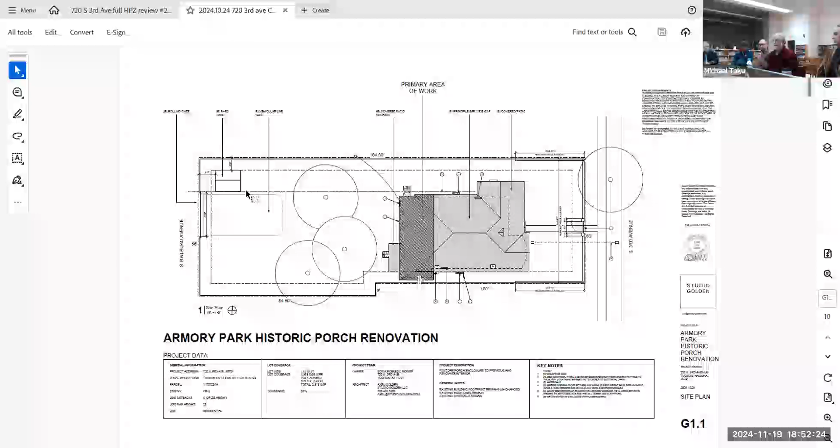Okay, I'm going to focus on the bullet points first, and then we can go back over any, because I think the bullet points will answer a lot of the changes.

So the first one is all new windows to be inset in the wall, not flush mounted, and dimensioned on plans. So I made sure to go through all the plans and make sure everything was heighted and dimensioned. I also added some window details on this page showing the insets, and I showed the original windows in detail. I also detailed the new window over the kitchen.

The next bullet point was specify door configurations, materials, and dimensions.

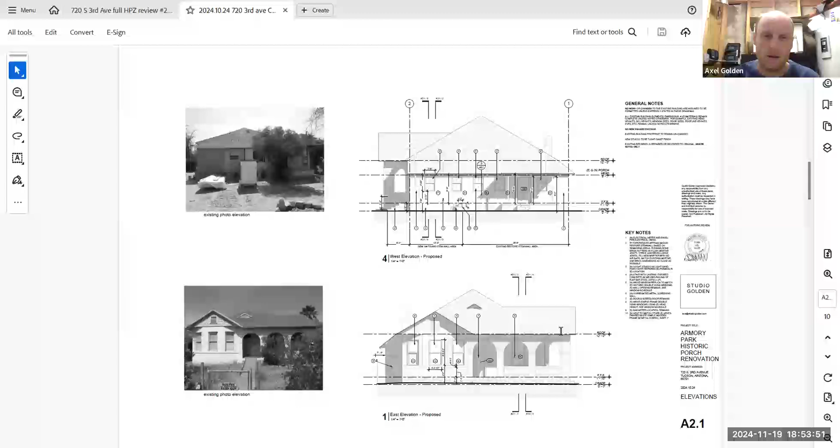I'm going to jump around here. On the window schedule and the door schedule, I put notes here and they're all keyed to each door on the plan, so all the details should be clearly and neatly connected in that way.

The third bullet point says indicate which windows can be repaired versus replicated, so that's also where I use this schedule to keep that tidy.

I think this is one of the bigger changes, which is that now we're proposing these windows to be fully replaced and replicated rather than restored, because I had the artisan back out to the site, and he highly suggested to just fully replicate them with new wood. He said by the time he was to remove everything, it would just be a lot more cost efficient and effective to just make new wood parts and do that. So I went ahead and indicated that on the plans.

So next bullet point, reconfiguration of the kitchen window should retain existing voussoir, western window line, and replicate any extension of a needed brick sill so the history of the window can be read. Also changed from a casement type. That's also keyed here on the plan.

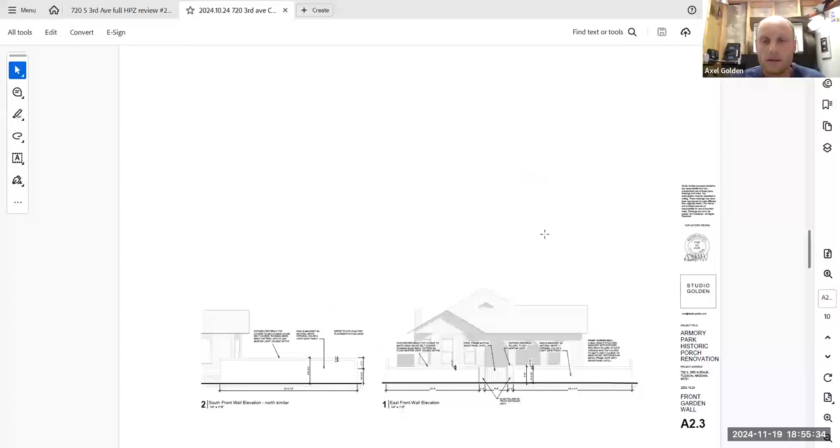I have a detail of it. Let me scroll over to it here. So here's a detail of that kitchen window.

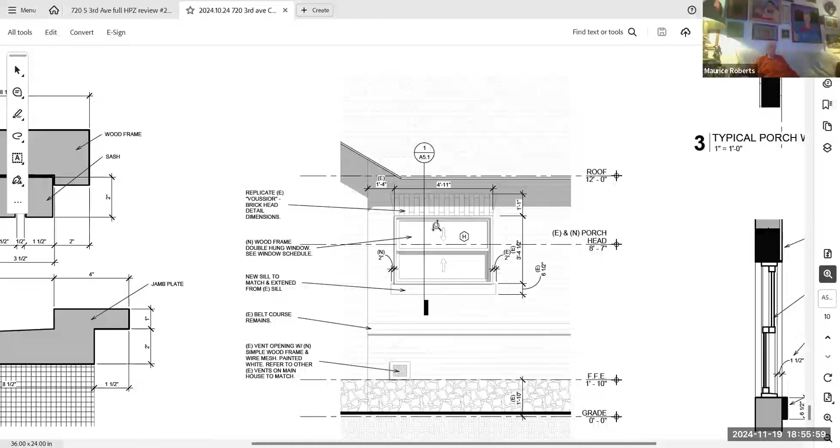We're proposing the window to be exactly like the other windows. However, it's going to have a wider shape to fit into that new opening. And then I have a demo detail of that wall as well, so that you can see exactly that opening.

I think it's at the top here, on the demo plan. Yeah, so right here you can see dashed. This is where we all discussed in the first review to cut just below the existing voussoir and then come over to this window side and create the opening that way.

As shown in the other elevation, the sill will be brought across and matched. There's a 2-inch overlap here on the left. And then I'm proposing the voussoir to come all the way across too and be replicated.

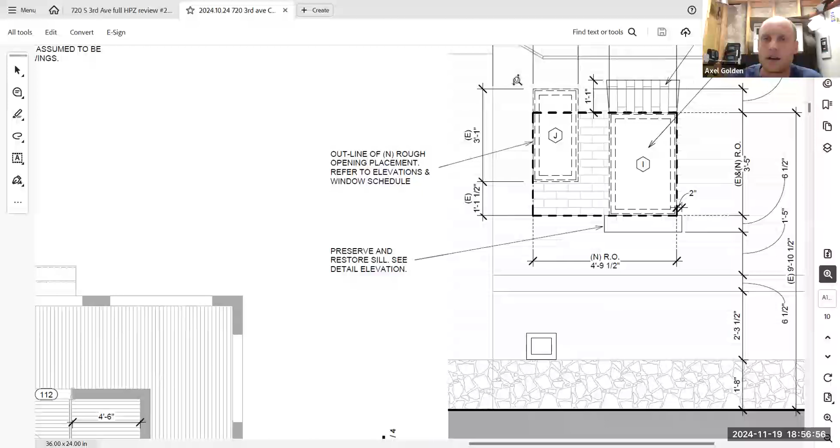The next one is consider reimagining the existing non-permitted rear porch to be compatible by stuccoing the exposed block. So I went ahead and noted that on the plans to stucco over the block, so that we don't have CMU exposed on the back.

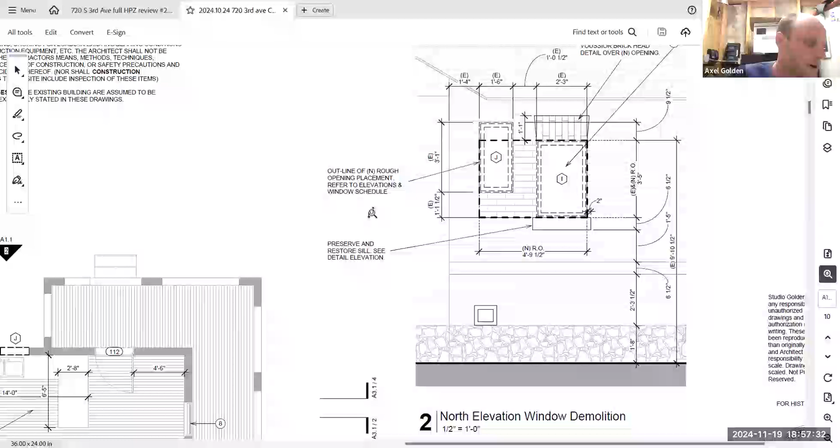Next bullet point is consider vents, scoring lines, and other proposed ground to rafter stucco finish on the rear addition renovation to minimize moisture problems. Provide continuity to architectural lines, specify and finish the stucco on plans.

So I went back over with the client all of our things that we talked about in the last review, and one of the other commenters had talked about leaving the new repaired rear stem wall exposed brick. So I went ahead and changed it to be exposed.

Sorry, I'm trying to also find... Oh, I think this is a good shot of it. It's actually in your other set of plans that were put on the side. There were two different things. You may have it all in one on your computer.

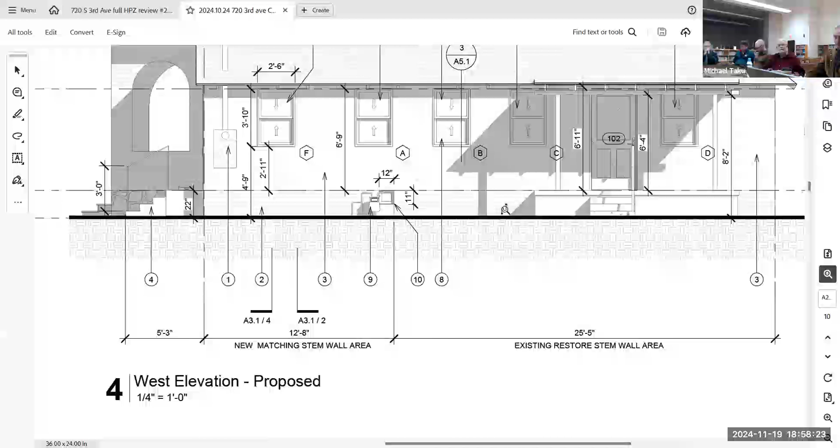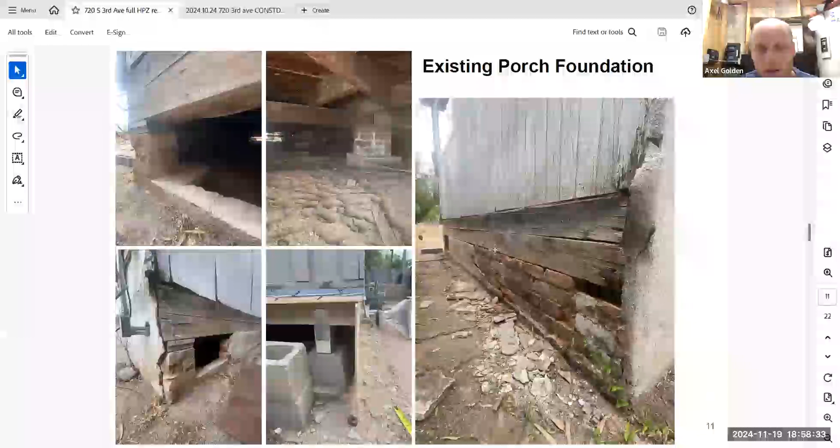So on the previous review, I had shown the stucco coming down to the ground and covering this stem wall. Now we're proposing to leave it exposed.

So I believe that's that bullet point.

Next one is consider screened storm windows for insulation and function of the restored windows, and potential modifications of an opaque and appropriate front screen door. So the client at this time isn't going to be touching the front door. We haven't proposed anything. I think in the future they may want to do something there, and we can come back for another review for that once they decide.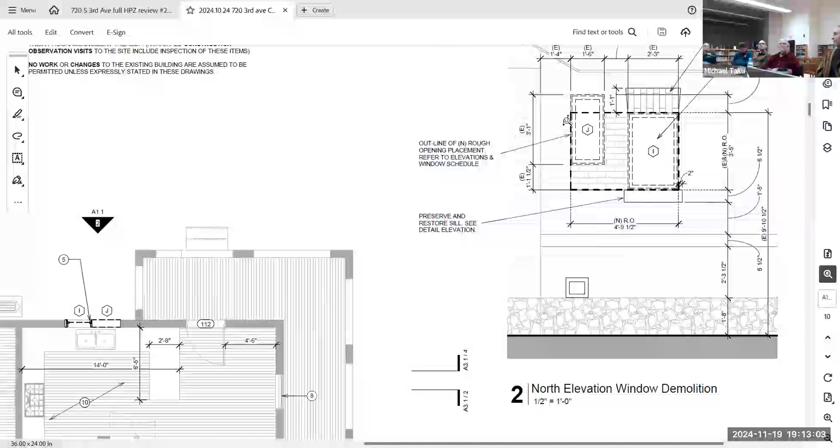Okay, next one, Helen. So what is your gate made of, in the front wall? Sure, the gate in the front wall. Let me go over the material.

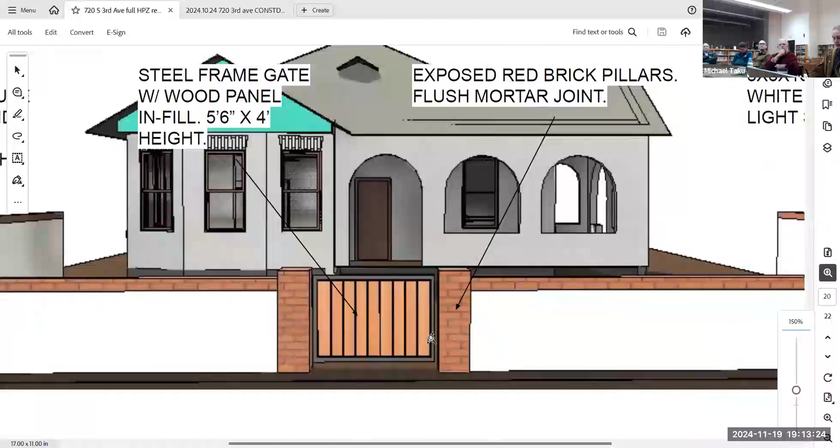Yes, I mean, what's the design? Is it closed? Is it open? It's infilled with wood and it's in a metal frame.

I think in terms of actually keeping the house, you would be better off not infilling. I think that would be one of the criteria, to see the house from the street. I think the wood infill detracts from that.

From seeing the house, the wood does? Yes. Well, it's only 4 feet tall, so you'll be able to see clear over the wall. It's a question of space and visual perception. It's a more modern approach to a gate than is typical in the neighborhood. But other people may want to speak about that too.

There is one thing - your original proposal, when you talked about it last time, showed a 4-foot wall all the way around, and now you've got 6-foot sides. Just so you know.

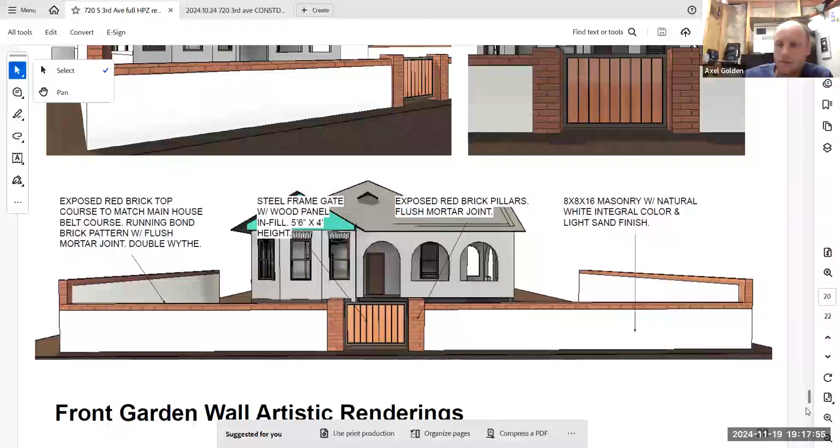There's at this house - let me see if I can find a picture of it. There's a fence to the north. Yep, I think it's just out of frame in my picture. Yeah, it's at 709 - it's an illegal fence. They never asked for a review or a permit, was never approved. So it's right over here on the right side.

It's a metal fence and it's probably 8 feet tall.

Those are never permitted under any case. It's amazing what people do, but we cannot use things that are not permitted as a justification for not following the code. If it were permitted, maybe you could use it as precedent. Based on what they're saying, it was never permitted, so even if it's in your development zone and it's 8 or 9 feet, the code does not allow that, and this board cannot approve you to go up to 8 feet just because that one exists.

No, that makes sense. I just wondered because it looked really tall, and I did look at this house years ago, there was a review for that fence, and I imagine that's when it was put in. But it wasn't clear if that review went through or not, I think it happened in 2015 for that corrugated fence to the north.

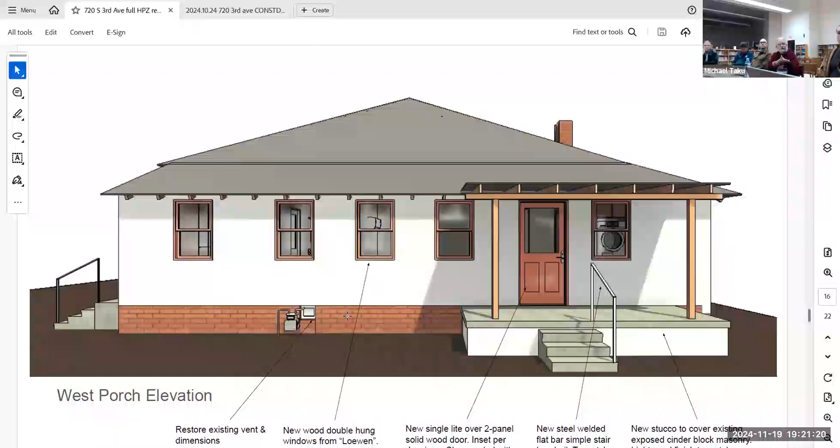I'm talking about the reddish color, it looks like a slump block. So a section of it you said is actually brick, and you're going to replicate it with new brick for the portions that are missing, correct? For your stem wall? Okay, yeah, I think it's not slump block, it's exposed red brick and it'll match the existing brick size, dimension, and color.

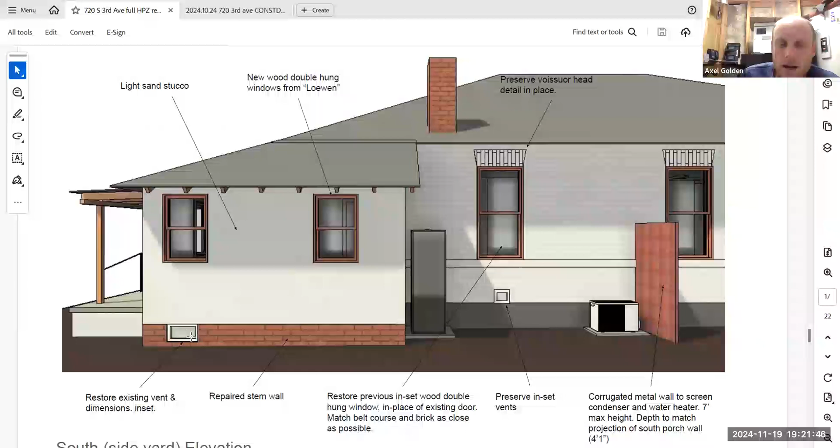And you're going to restore the original vents there so you have ventilation underneath that porch extension? Yes, this is an existing vent on this side, it'll be inset, and this is an existing vent here. And then I'm proposing a new one on the other side here.

Okay, so you get some cross vent. And then you're restoring the vents all the way around the rest of the baseline, which we discussed last meeting? Yes, that's what you planned. Yes, for example this one has a rag stuffed in it right now, so it's gonna get a new vent, properly mounted, and there are a lot of intact examples to replicate.

One other thing, the Secretary of Interior Standards and UDC 5.8 and TSM 9-02 say to repair a window over replacing it. Last time we saw you, you said you were going to do some repairs to a few windows, but most of them were fine and it didn't make sense to replace them.

And now you're proposing replacing every single window in the house with a new fabrication. It does not show an ogee detail, which is original. Are there some windows you'd be okay with retaining the originals for, and maybe putting on a new storm window or some other insulation, rather than replacing every single window, because that's not what we usually allow?

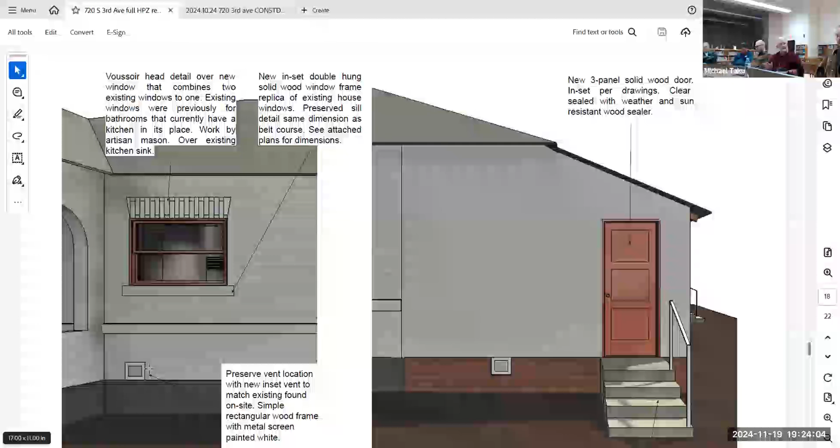Yes, so by storm, do you mean covering it up with a front to preserve it? Yeah, you could make, instead of a screen frame in front, since there's a little indent in the two side portions of the window framing where screens originally fit, a new storm window that is glass instead of screen, inset there over the original window, preserving it in situ but getting the net effect of a dual pane window.

I see, especially those three on the front where you see them from the street. If they're totally brand new, they don't have the ogee, and they're obviously new, even though they mimic the old style, it'll be pretty obvious that everything's been changed on that house.

What if even if he exactly replicates the wood? I was surprised to see it because we had always talked about the south window in the front parlor and replicating one, where you're taking out a door on the south side and putting a window back in, but you had not mentioned any of the other ones according to cost, and now you're presenting replicating and replacing every single window on the house, which is not usually what we ever want to do.

So basically, the code allows you to replace as a last resort. You have to show every effort that the window or the door that you are replacing cannot be repaired. So the first preservation approach is we repair. If you cannot repair, then you can move to the next stage, which is replace in kind. But based on what is happening here, you're just proposing to replace the windows without justifying that you cannot repair them. I guess that's what the board is saying.

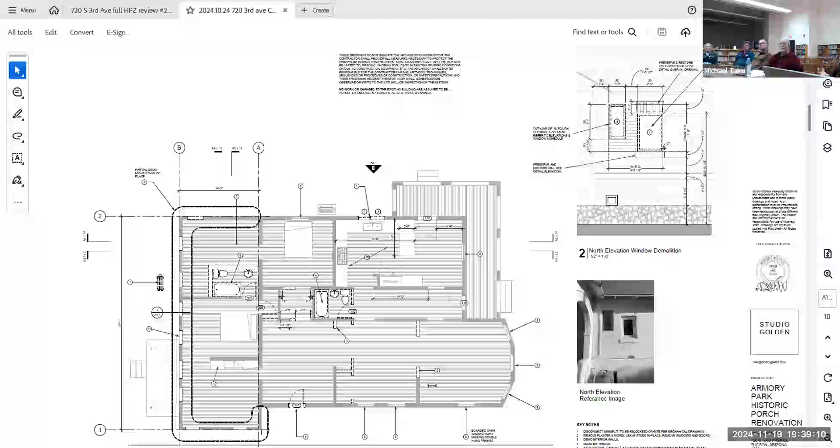And we're not allowed to discuss the inside, but I find it very sad that you're removing the original pocket doors in the front room. There are not that many left, and you've got a really nice set of double pocket doors from your front room that are original, and it's a character defining feature, even though we're not allowed to talk about interiors. So if you could possibly talk your client into keeping those, they will find that the house will have more value and a lot more integrity if you do. I'll absolutely tell him. Okay, anything else?

So instead of the one long window, it will be 2 small windows with posts. Okay, and then on the kitchen window, you retain the original voussoir. You replace brickwork with the string courses that are there, and you do 2 double hung windows with a central post instead of an elongated one, but you do extend the sill. Okay, does someone want to formally make that motion?

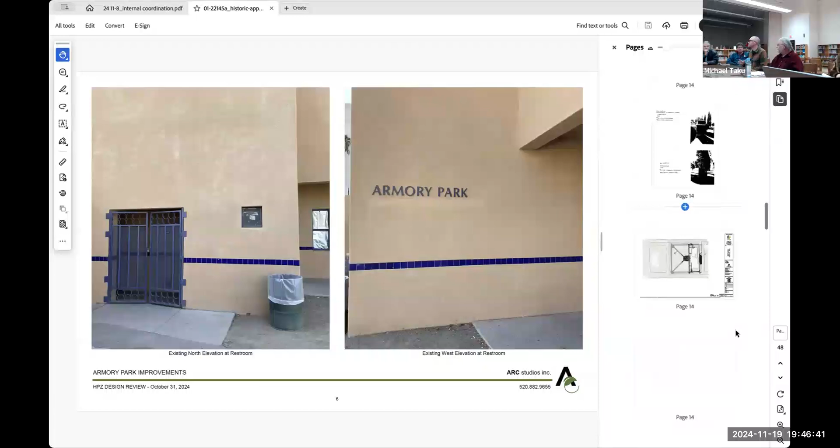So that's pulling up. Good evening, everyone. I'm Matt Smith with Arc Studios, Eric Barrett to my right with Arc Studios, Michael and Valerie with Swaim, and Elliot and Jasmine from the city are on the call as well. We are representing Armory Park, specifically the dog park and the pavilion areas. After the last meeting, we were taking a look at those. And then after that meeting, we met with the historic landscape subcommittees and got some feedback. So we've taken all that feedback and compiled it into what we're about to present.

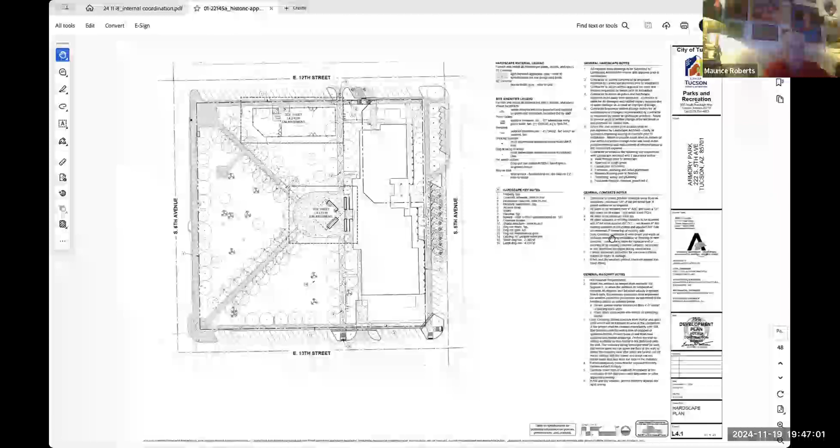Starting with the dog park, the initial feedback was that it was not a shape that fit the park and it was overly large. So we explored some ideas, met with HLS, and this plan works for now, and have this to present. So this dog park, we've turned away from the term 'dog park' and we're calling these dog runs. For reference, the large dog run is 4,700 square feet and the small dog run is 2,300 square feet.

They are all towards 12th Street, with entrances off the sidewalk off of 12th Street. Two maintenance gates over the water line, with one service maintenance gate between the two dog parks. Overall, the dog park intrudes into the park by about 50 feet. It's about 150 feet total long. That longer, you said 145, but that's... round it down. Okay, I don't have those numbers right on. It's all right.

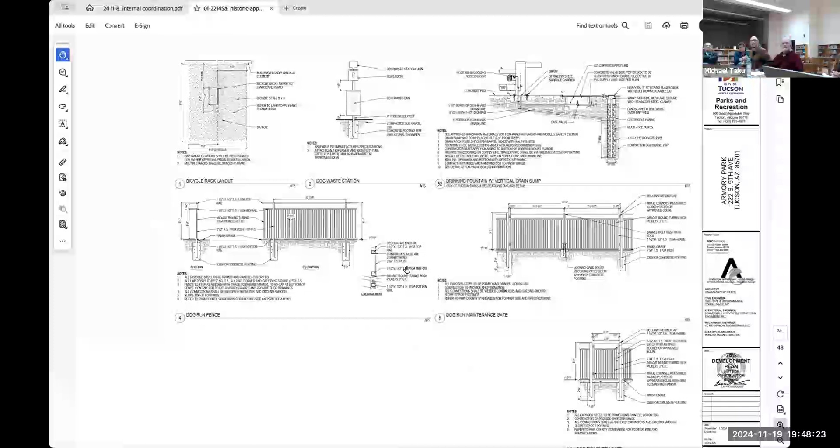The fence itself is still going to be 60 inches tall. It's going to have pickets up to 4 feet with a middle rail and then a top rail, so that top 12 inches will be open aside from 2 rails. The surfacing of the dog park is going to be all sod, except for the 2 entrance corrals and pads for picnic tables.

So these are the fence details. The maintenance gates and the single gates will be in a similar style. Pickets are 3 inches on center, and this will all be painted black or bronze or some color scheme in that range. I know they asked if it could go down to 4 feet, I take it, so they came back and said no, it has to be 5 feet, for security and safety.

It's a quick overview of the changes on the dog park.

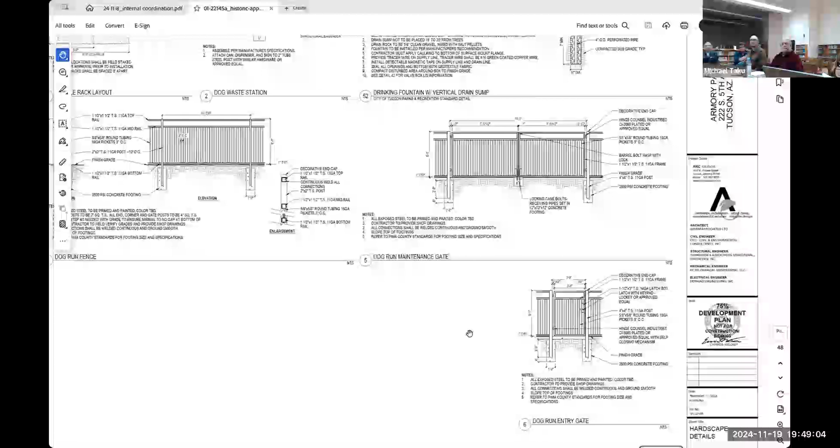Moving on to the pavilion and plaza space, Michael and Valerie will dive into that further, but some of the changes that came from the landscape subcommittee were to remove the central sod area. So you'll see in the drawings that is going to be replaced with concrete, and we are going to share generally two versions, one rounded, one square, for the plaza space.

I think this is a question for you, and we can do it later, but you showed us plaza street furniture before, and then the city said concrete. Are there just now two picnic tables and two benches in the dog park, and no other benches and tables in the park? There'll be other benches in the park, but they'll be concrete. Picnic tables, as of now, are just within the dog park.

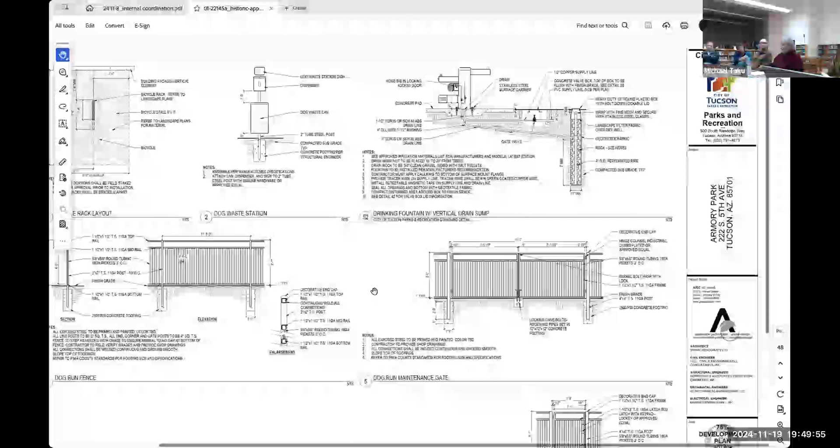Are they shown somewhere or no? I've got questions about plants, but we can do that later. Okay.

So yeah, like Matt said, we met with the historic landscape subcommittee. Helen was there, so she was a witness to all that. This is what we presented before, the different options.

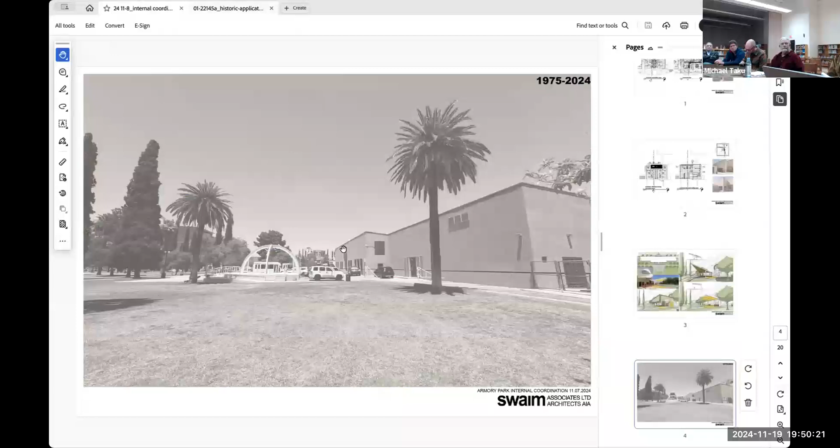I did want to show just briefly the park pictures again. Let me close this, I think it's a little larger. Sort of current condition of what we are looking at, with the existing band shell that we'll be removing.

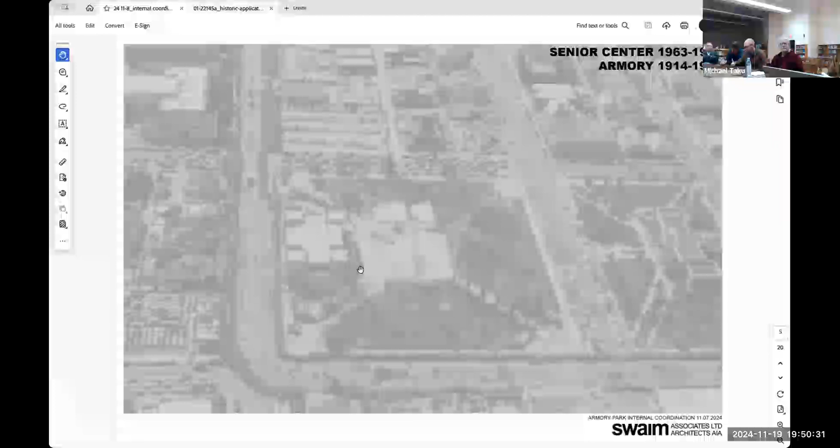This is the park from the mid-century with the larger plaza. This was one of the things that did come up in the historic landscape subcommittee meeting, about the central plaza being more square than round, and really talking about these trapezoidal shapes on three sides being the character-defining feature. So we were working with that in this redesign.

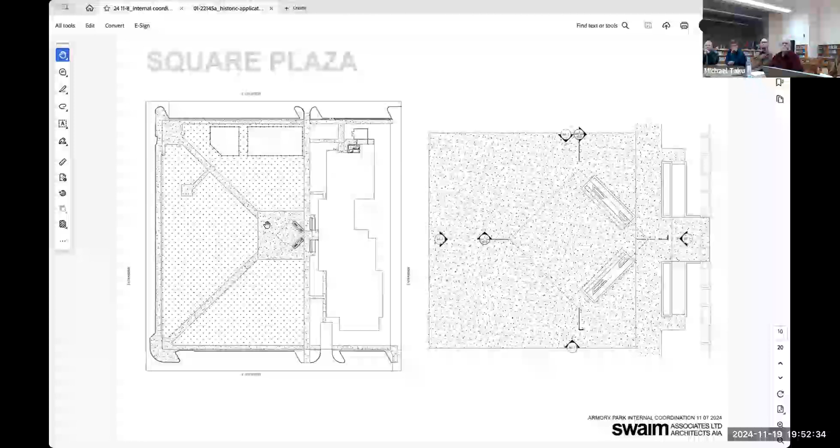The other comment we got was not to have any turf. We used to have turf in the center of that circle, and it was brought up in the landscape subcommittee meeting that traditionally there was never any turf in the center of the park. So we were asked to remove the turf and provide pavement there.

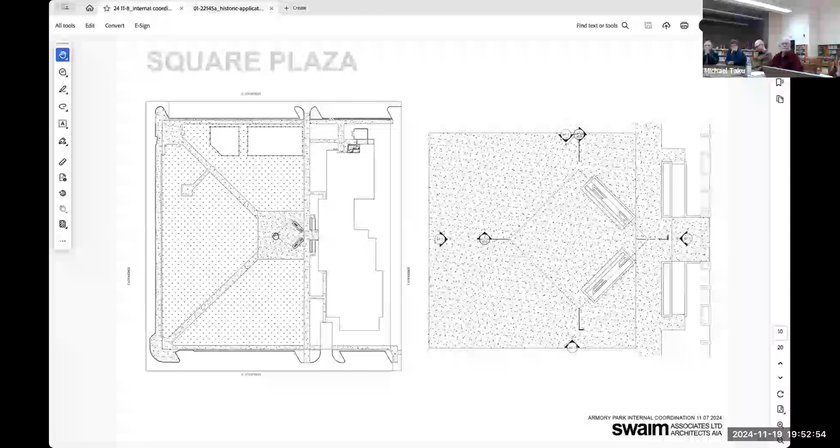So what we're showing here is that simple square plaza with our diamond-shaped pavilion sitting on that. The way we've laid this out, actually, the point of our new pavilion is about in the conceptual center of the park, as you'll see in the later drawings.

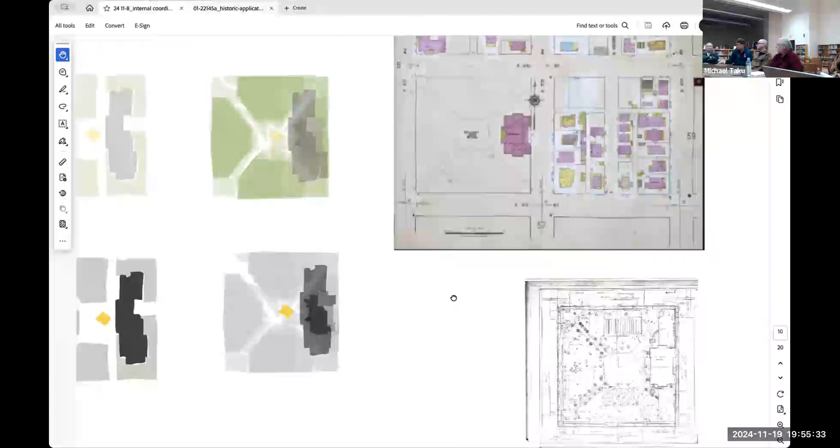So my dates are a little off. The photo you showed that's mid-century does show at least the north and south sides having a little bit of a curve, which is this drawing here. Let me zoom in on this.

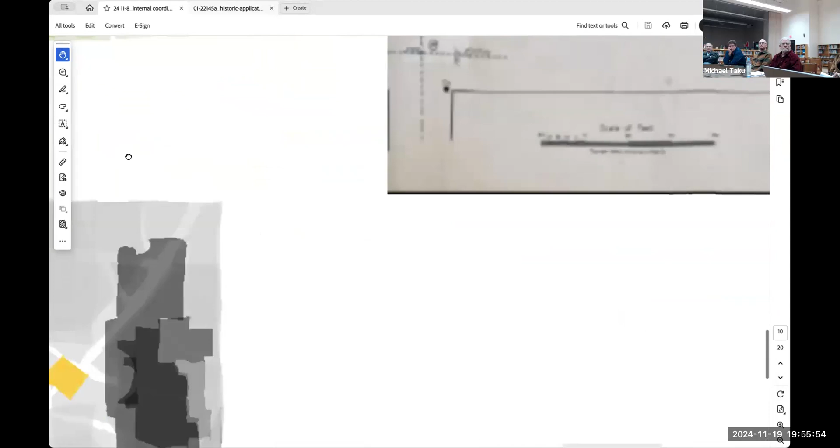Get way in there. This was the document from the mid-60s, so it's kind of there, but it's eroded to a certain degree. The edges of that pavement have simply come apart, I think, more than anything else—that's what was happening there.

So they were comfortable with the form and shape of the pavilion, but they were not supportive of creating a solid screen wall there, and actually suggested we have no plantings in the center at all. I think we'd still like to have some plantings, and we can have that discussion tonight.

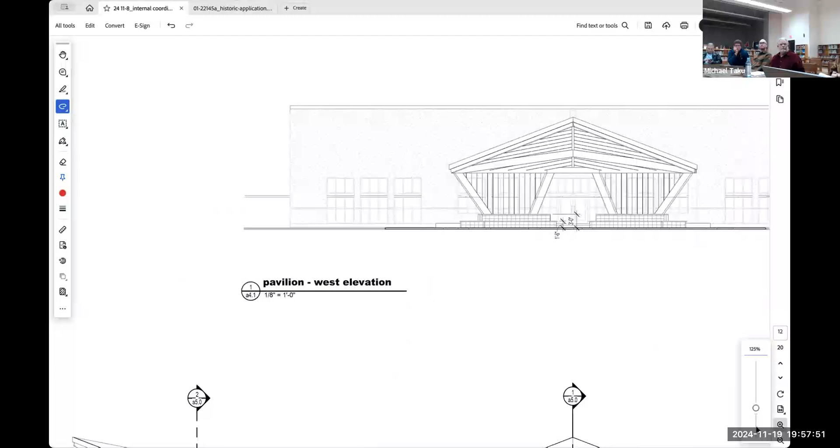That's what you're seeing here—these would be some vertical cable structures that we could grow something thinner on, some vines or something that would create that backdrop, or use as a basis for putting up backdrops if something was staged. Actually, the way the structure is laid out, we could have hooks and hang things from the structure itself as backdrops against that back area.

And Valerie, jump in if I'm missing something. Doing great. All right.

Everything's a little laggy tonight.

The other things we talked about were, again, we're showing this as block only because that's what Revit does. We're thinking this lower portion, and you'll see this better in the renderings, would be either a dark masonry or the black rock from A Mountain if we can get some of it. So this is all dependent on what we're able to get, but at least we want to use a dark, more irregularly shaped masonry for that base layer at the bottom. It would have a cap on it that would be a precast concrete cap that you would sit on, making the seat wall.

And then we were creating a higher wall behind that. In another rendering, this is shown as concrete, because the one thing the landscape subcommittee talked about was people actually being able to stand up here and use these pieces more as an occupiable space rather than just a planter that keeps you out of them. So from the pavilion side, the underside, you'd be able to sit and stand on those two tiers. And then from the backside, it would actually drop into the planter where either vines or some low ground cover could grow. I'll show you the plan of that in just a second as well.

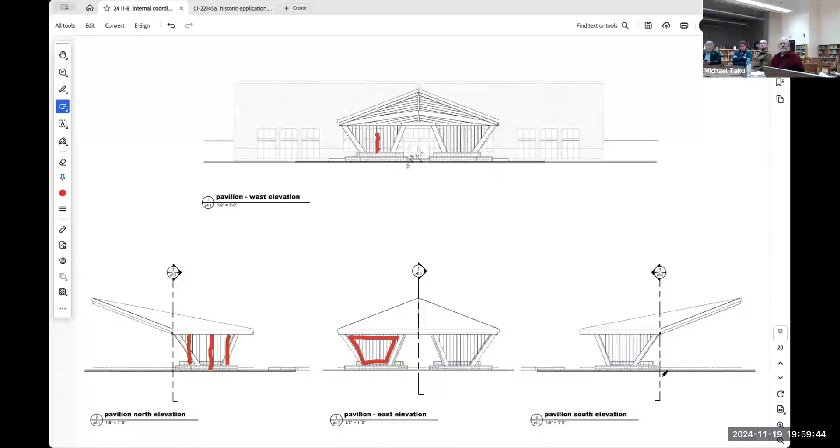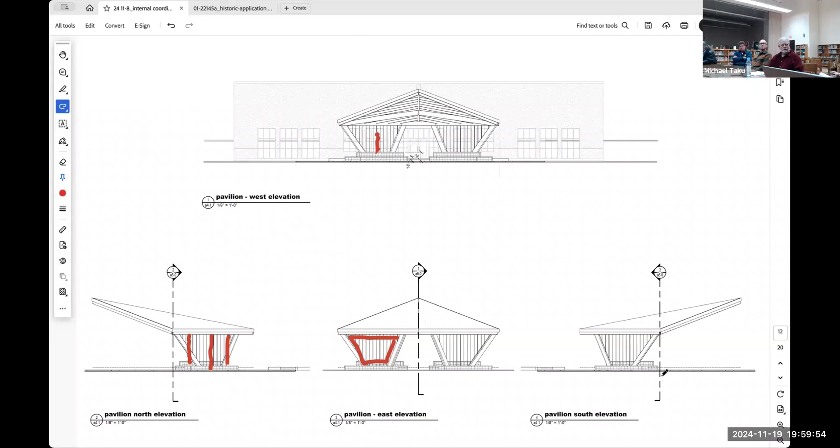Could not tell past the seat cap, is there gravel down in a hole, or is it level? We would bring the dirt - it would be filled with dirt for planting inside of it. So it'd come up basically level with the seat height, okay, or a little lower than the seat. It was hard to tell from the photos we got.

The roof material, we talked about this last time. We're looking at a metal diamond shaped shingle, which we think just has a better scale to it. It's also painted, so it could have more of a matte finish and we won't get reflection. We were very concerned about the light reflecting into the senior center itself, so we were trying to find a way to soften it.

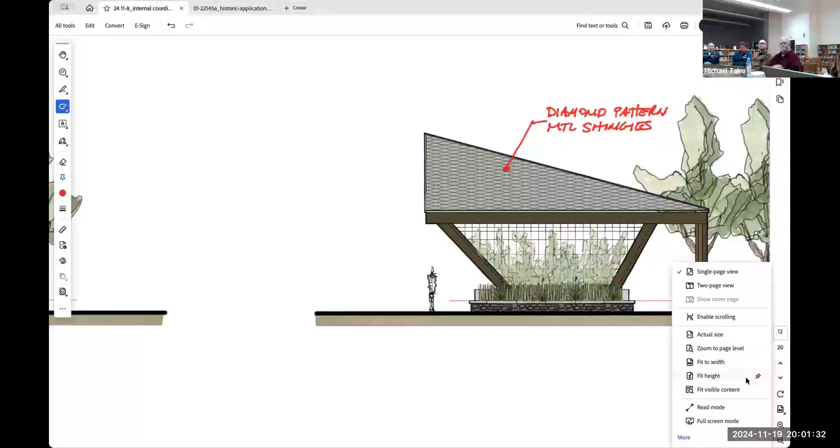The shingles, do they need to be painted or are they factory finished? They're factory finished. We can get a galvalume or something like that, but we felt we didn't really want them shiny necessarily. It could be any number of colors. And all of the angle brace, is that all steel now or concrete? Everything, everything brown here would be steel. So it's completely steel structure, other than obviously the planter.

Let's zoom back to fit the width. This is just a very - sorry, oop.

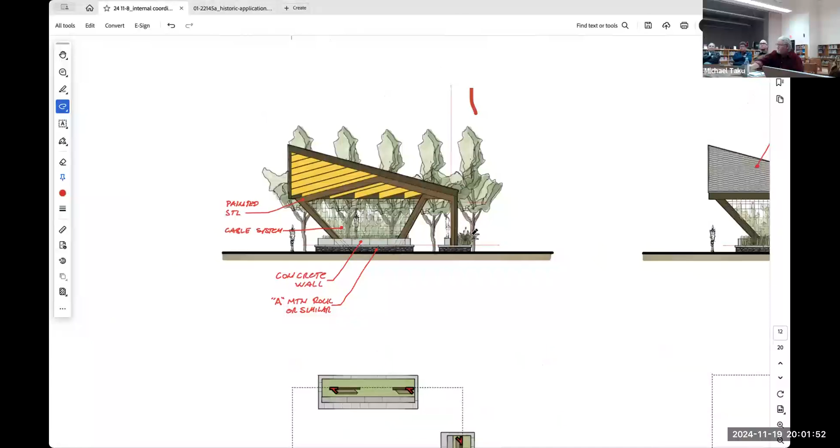Sorry, yes, so that's where you're putting planting. Yes, it's there, well, yes. That's what I'm gonna show. It's right, it's this plan right here. So you can see this is the inside of the pavilion.

That's the seat wall, that's the taller concrete wall. What you're seeing in green is the planting. So that seat wall wraps all the way around, and then it's been reduced to more of a regular geometry, as we felt came out of this meeting and the historic landscape subcommittee meeting - those curved forms weren't appropriate for the park either.

I don't understand that column, the vertical column, the straight vertical column. I see the two sloped columns in the planter themselves, but you don't show the vertical column. You're seeing these two sloped columns in elevation, so you have sloped columns on two sides. So when I look straight at this pavilion from this direction, that column looks vertical because I'm seeing it from the end.

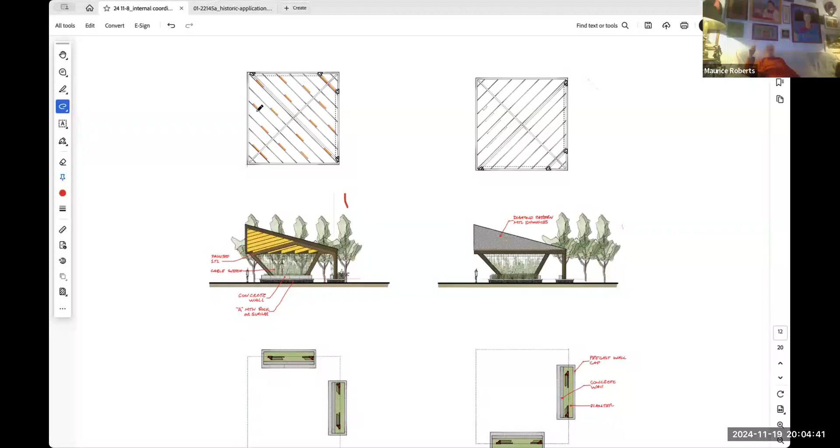I'm proposing yellow right now, but that's a conversation I want to have tonight. That's another item - if we start talking in circles, we'd rather bring the color conversation back for a future discussion, which we're happy to do. We've been going round and round on color ourselves.

The historic landscape subcommittee suggested blues and greens. We just couldn't quite get it to where it felt right to us. So I'm showing more of a bronze, brown, and then this sort of yellow to have this warm glow to it. But that was when you still had 3 processional arches holding up the roof structure.

Now it's entirely different - it's now being applied to the underside. That's probably the biggest change: there were the 3 arches from the previous scheme, and now we're down to basically 2 arches that are slightly splayed.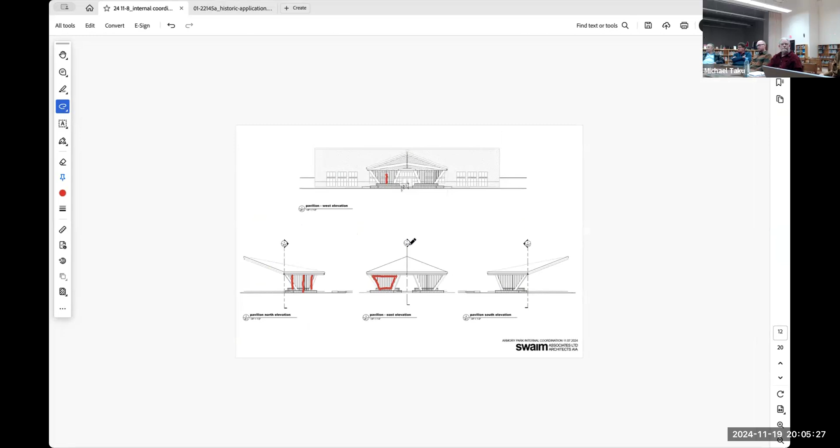And you had them colored red and orange - yeah, it went from red to orange. I was thinking that looked too much like the Tucson Metro Chamber logo. It was bothering me.

These are some additional renderings I did, and this is where you can start to see what that lighting might do. You don't actually see the light source, but you get that warm glow in the park.

The other idea we've been thinking about is that the lighting might be on a sensor, like a parking garage, so it will dim down if nobody's there. But if someone comes and stands under that space, those lights could come up just a little bit. I think what that does in a lot of ways is make it safer if there's lighting under that pavilion all the time.

I think the color could also create a very inviting space for people to move into. If the light comes up, then it's obviously somebody's in there at night. So we're trying to create a way to have this thing be a little bit interactive, but also increase the safety and visibility on the site at the same time.

So they're gonna have to replace all that stuff every 8 years though. The sensors, the motion sensor? Yeah, possibly - you know how Parks and Rec is. Oh, that's true, that's a good point.

These are just some additional renderings, and this one I just took from much further away, trying to convey that idea of having this warm glow in the center of the park.

We can certainly have the lights shut off. This is what we're going to discuss tonight - is this appropriate? How do you feel about this?

In terms of what the fixtures are, this is one example - this is a pendant mount, but they also make a surface mount fixture you can see here. It's a linear LED fixture with both a direct and indirect component. We would mount it to the side of the beam, so some of the light would go up onto the roof to get that reflected light to come back down, and some would actually shine down onto the concrete below.

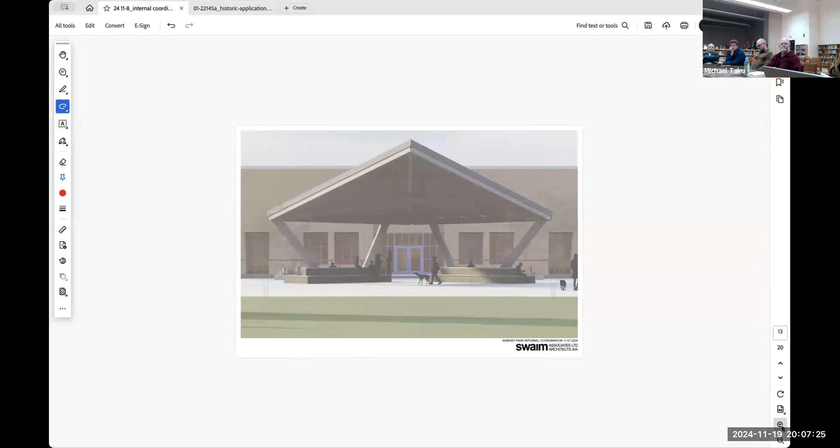We went down to just 2 of these arched forms that are now canted a bit. Here it is from the side. This was why we changed the structure, because in the previous version these were 3 very thin vertical lines, and it felt top heavy. That's how we found to solve that problem and have the columns have a bit more weight, but feel more appropriate in terms of the overall form and shape of the pavilion. They're kind of fun, but don't you just kind of expect Spock to show up?

So it is a contemporary form, and I won't argue that. This is from the senior center looking towards the children's museum. The landscaping in these renderings is not complete and not accurate. I just want to make that very clear.

That's why that rendering you were just on is why I questioned what you were talking about with plantings. That would have ground cover, which is what we would intend. And then we'd have some vines that would come up these, so you get somewhat of a filtering screen and a backdrop for the stage element, but it's not completely opaque.

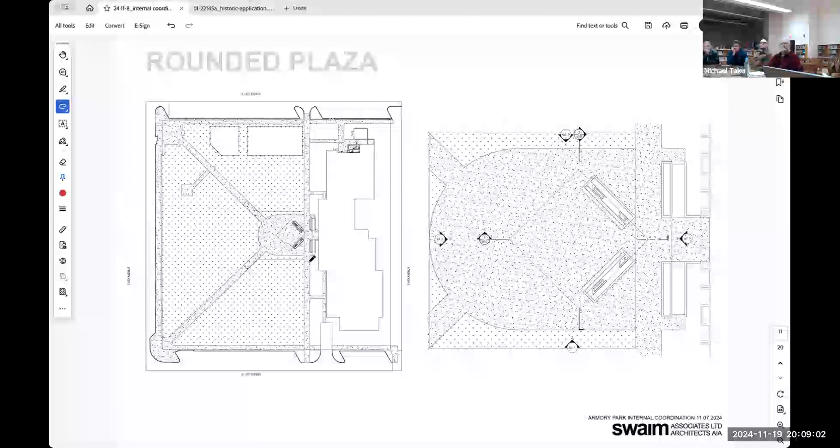The last slide is just going back to that rounded form of the central plaza rather than the square form. You can still see the square form outlined on this drawing, and the square form is a little bit bigger. The reason for that is really to get back to targeting that 1914 to 1963 sort of size of the plaza. That was the recommendation for landscapes. So that's the brief version of how we got to where we are today.

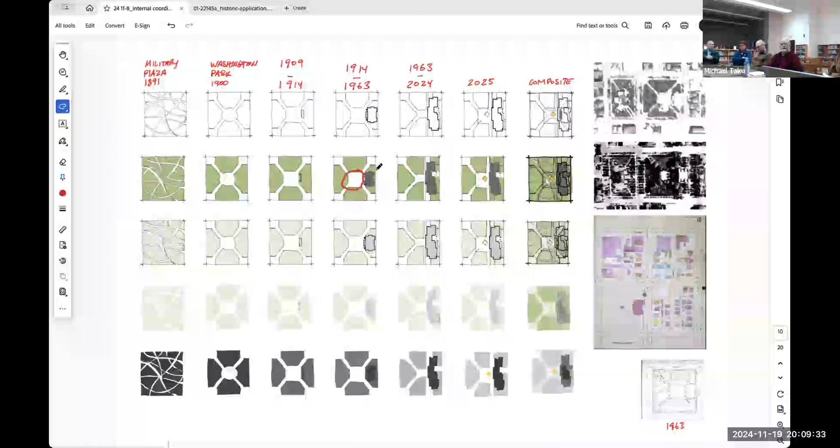Actually, yes and no. They never saw a square plaza, they saw the half circle plaza. But as we discussed it, they did say take out the turf and do hardscape. The entire time we talked about a square plaza. But that to me looks like it's got a north and a south curve to it. Maybe that's just... I'm not disagreeing with you.

Michael, given that this is a park, have you considered graffiti? On the steel structure, it's painted, so you would simply paint over it. I mean, there's not much we can do about that. If we build anything, somebody can tag it. A spray bottle with lacquer thinner works really well, it just melts right off.

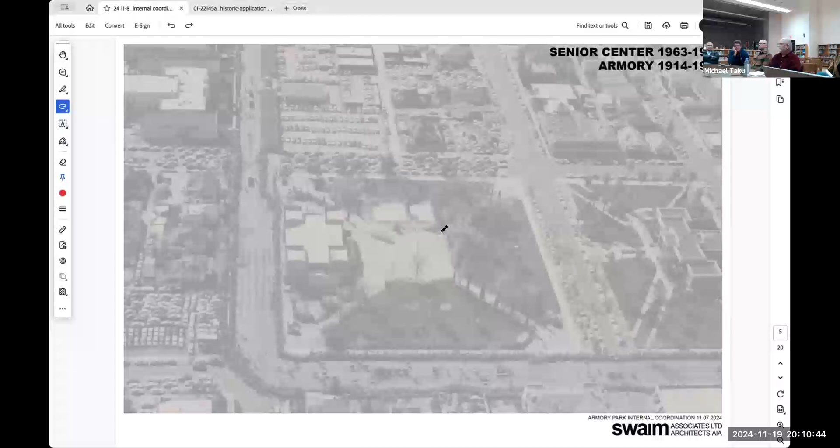So, just delineating the rounded versus angular, would that be in tile or based on the ground? You're saying do both, sort of? No, I was asking how you had sort of a circle inside the square. Oh, no, that was just simply showing the options that were presented, those 2 different design options. One's a square option, the other's a rounded option, and we basically just left that line in to show where that is in the other version.

I'm doing both. Two questions here. How are you going to interface the plaza and the walkways? The idea is the entire structure will be concrete in the center here. I'm talking about the integration as you walk in, in other words, the diagonal pathways.

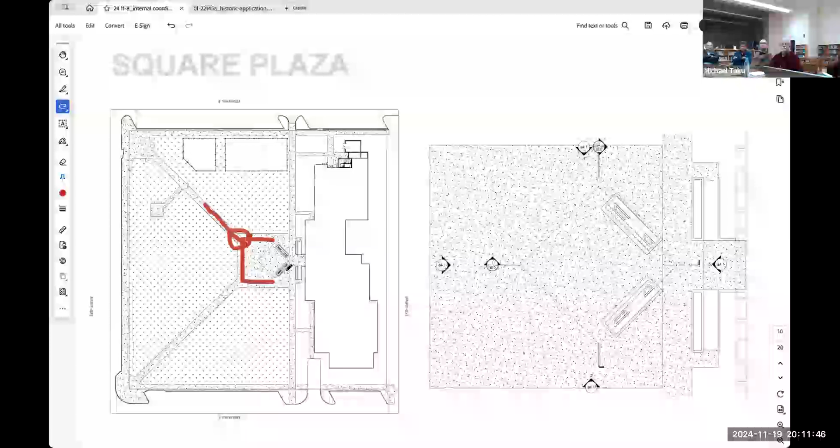Yes, those are broom finish concrete currently. You're talking about that point right there, that's part of this central design, whatever we do with that overall paving pattern. Maybe there's a border around it that has the same finish and texture as the sidewalk, something like that. And the other point I'd make is that if we have it designed, it should be subtle, because obviously we don't want it to dominate that central area.

I'm thinking maybe subtle changes in tone and texture of the concrete paving with control joints. It would appear as a uniform slab, but when you got on it and looked straight down, you'd start to see something going on there. We give enough cues that somebody could start to pick up what this is. It's a whole design project in and of itself. I think it could be really cool, but it has to be really subtle.

We could do iterations of the actual surface texture as a later minor review when plans develop further. If you're interested in this idea, I would want to bring that back fully developed, probably more than once, to show you how we're developing this.

So you're basically just asking for approval of the concept and structure. The planter structure is what we'd really like to have approval on, because then we can finish our drawings. I'm more than happy to bring back the color, surface texture of the plaza, and lighting if there are concerns about that. If we can get the structure and the planter configuration approved, that gets us moving in the direction we need to go.

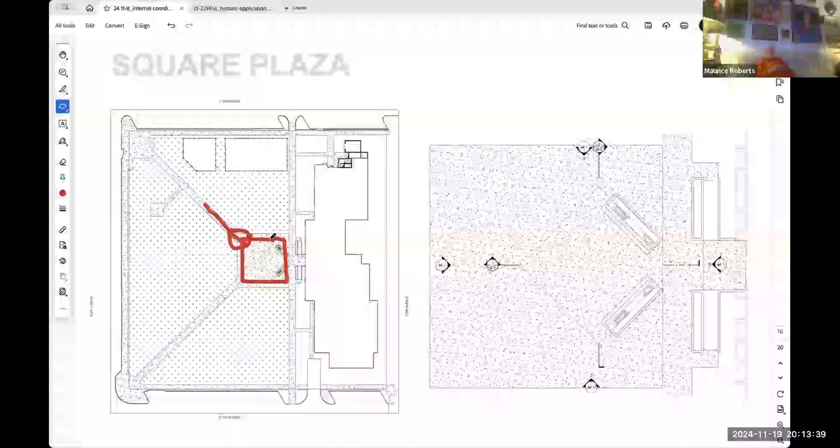I'd also add just whether we're going to have a radius or square plaza shape. We should find that out.

On one of the perspectives you showed, the angled walkway going in actually showed a diamond pattern, which is not accurate. That's just a mistake in the rendering.

We're not planning that. I think currently they basically go across like this, with 4 or 5 foot finish squares.

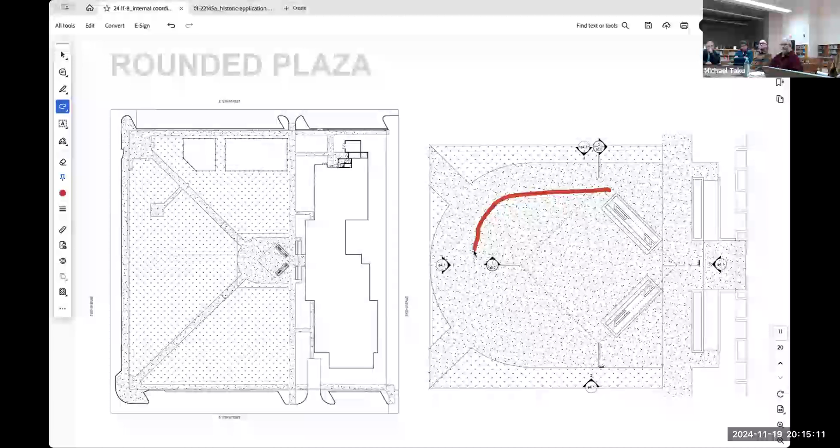My personal preference is to keep a half circle. That's the only historical reference that there was an arch in the park, that there was a band shell form. Traditionally, amphitheaters are always half round. There will be no circular elements whatsoever remaining in the park otherwise. I kind of liked what was shown before with the broom finish, smooth walkway all the way around, with some sort of infill with another surface texture instead of turf in the center, to tell multiple stories, because we can't do arches, we can't afford that. But the circle is part of the history of the area, and if it goes away entirely, there's no reference whatsoever in the built environment. But that's a personal preference, I thought I'd throw it out.

If I might put my two cents in as well: I'm afraid to say we're back to the gas station design over here, I'm not really very enthused about it. John was 100% right that we no longer have a round structure, which was part of the historic tissue of the park. Just thinking out loud, but did anybody ever consider a simple design like a Quonset hut type of design? It doesn't have to be closed on the side, it could just be the top of the Quonset hut. But if we do that, we stay within budget, and at the same time we're still keeping the old band shell design. It's just a thought. The more we go into this particular design, the more we're going back to the gas station standard, and I can't really go for that. We're losing the whole spirit of the band shell type design, the round design in the park. So at any rate, that's my two cents.

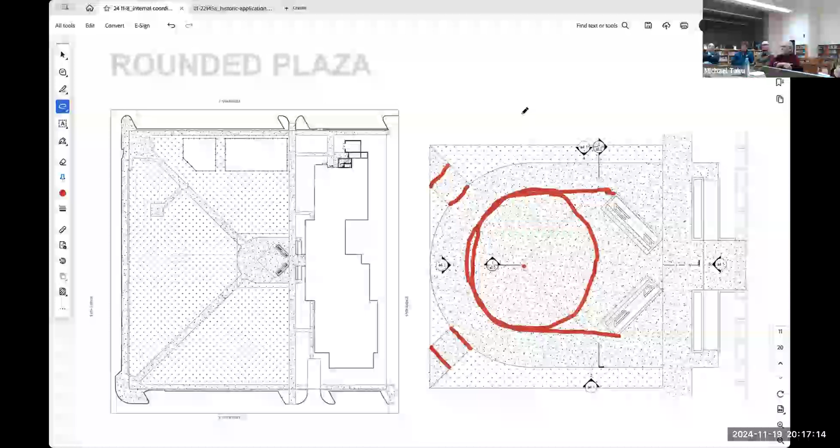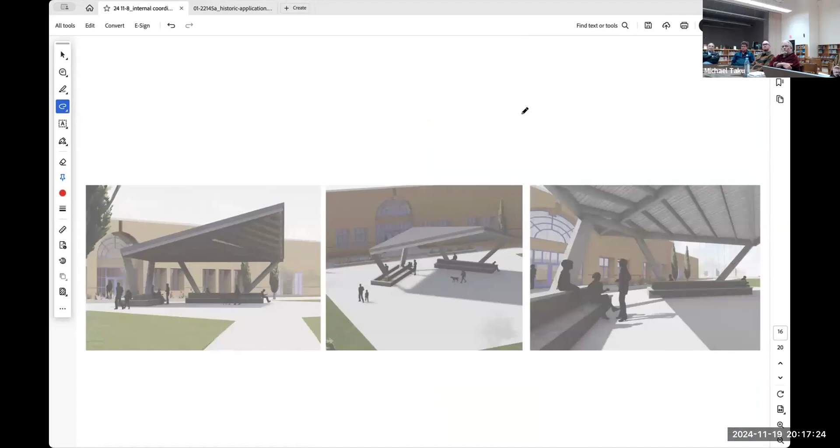As for Maurice's comments, I think what you've done is an excellent job. I really like it. I think it's unusual for Armory Park, but it's an example of change as we come along. I think it fits well, it's a lot better than what we had before. I think it's appropriate, the scale is there, the relationship to the rest of the park is there. I'm quite happy with the results here. I'm looking forward to seeing the landscaping and the texturing of the pavement, but I would strongly recommend that we stay with this plan.

I don't mind it either. I like the processional thing. It's more classic, I know, but it's all right. It's structurally functional.

I think it is in some ways more elegant, and it still features the centrality that is so important to the park. That's exactly what Valerie and I have been struggling with - how do we make this an elegant, contemporary structure, but one that's in context to the park in a way that feels integrated. I think we feel like we've gotten pretty close, and it's getting much better, though the potential plantings and their long-term maintenance could be a longer discussion.

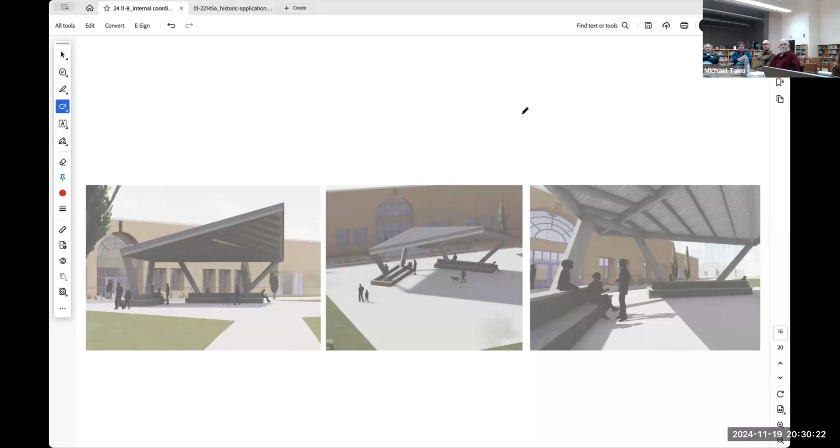So maybe we could have a talk about bronzy tones that might age better, or other options. We were still open to that tonight, bronze or black, for the fence. We weren't quite leaning toward retaining this more, honestly that's a minor element, as opposed to cost implications. Some of these designs shown today have that bronze color on the pavilion as well, so it can make some sense.

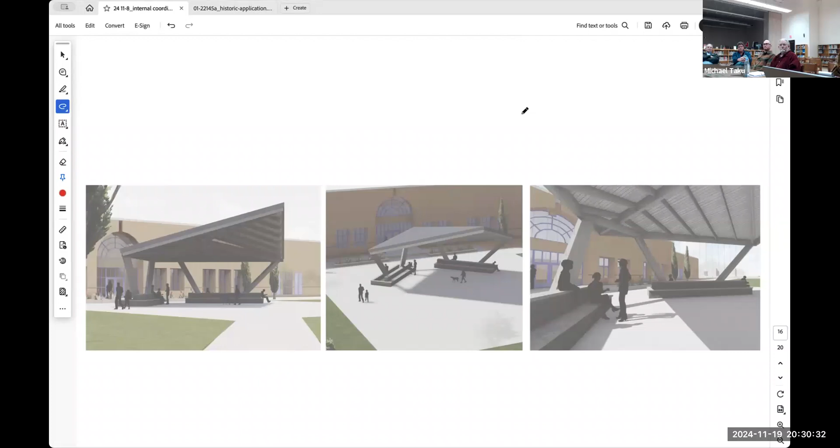So Michael, can you just maybe tell the board the items that you actually want a recommendation for?

Hold on, you gotta talk about the dog park. That's part of it. We've got to do dog park and plants final, because it's been revised several times.

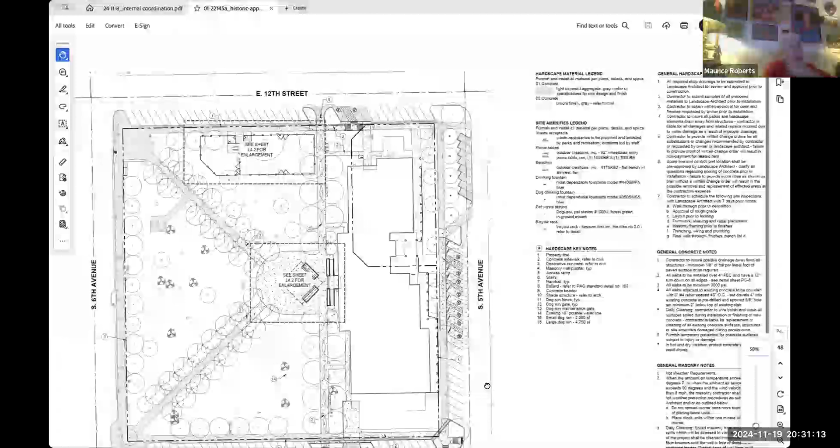So let's just agree to disagree on the existence of dog parks. But I think the team has made a really good effort to minimize that, and generally speaking, given all the other things stuck into this park, this is actually an improvement. Get rid of the rest of the junk and it will help a great deal.

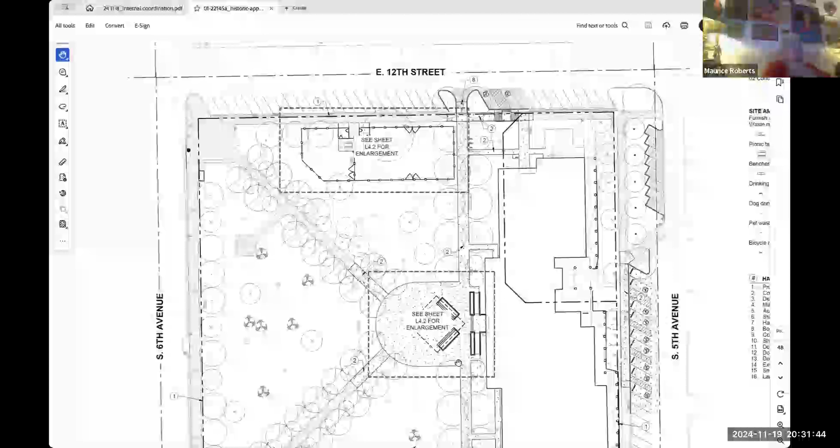So, I have a question, if there's two picnic benches, why are they in the dog park? So the dogs can eat lunch. I was gonna say, the last place I want to eat lunch is in the dog park, especially since the whole thing is 7,000 square feet and basically a poop station.

No, I think additional materials are something you have to talk about for parks in general. It's like furnishings, but additional furnishings could be part of the ongoing discussion too.

Well, because the city seems to be cheapening up, approving park benches that nobody could sleep on, but are flat ugly and look like Fred Flintstone's walking in. Exactly, just what we...

Site furnishings could be another discussion, but there are set standards at Parks and Recreation for durability - vernacular materials that they want to use. So we are guided to that direction. I don't want to go to metal or something else that would be more appropriate for the period of this age.

I think that's where we're going to have to struggle. But we're told to do certain components, and we're trying to make sure that whether it's concrete or steel, at this stage for our approvals of form structures and moving forward, that's not critical, I would say.

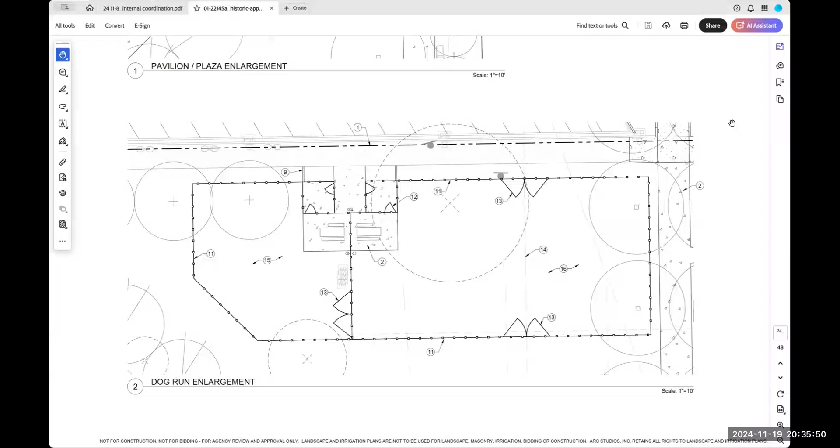I do have a question regarding the dog park. We saw pictures of the park going back to, what, 1909 or something like this? Can somebody show me at any given time since 1909 where there was a dog park near here? This is supposed to be a historic park. Am I right or am I wrong?

I'm glad you're on the record saying that for the recording. But we are stuck in a situation of having to mitigate the approval of the park for the historic standards. You said you were going to talk to SHPO - have they said anything about any of this, or have you been able to reach them? I have not talked with him. Okay, but they're completely understaffed as well, so we're doing the best we can to make sure that the historic integrity of the park moves forward.

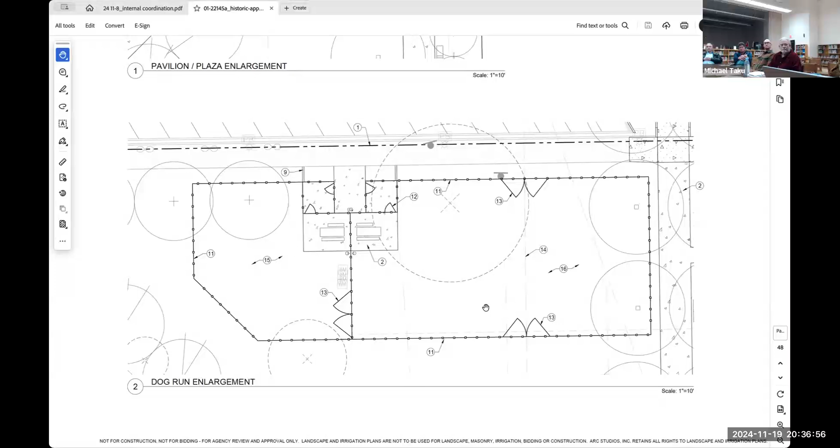Let's do bathrooms, because that will take 2 minutes. We really didn't make any changes. I know the Historic Landscape Subcommittee said look into adding as many stalls as possible, but otherwise what you're presenting tonight is what you presented last time - correct, except slightly different modifications and a roll-up screen. Is there anything else we need to talk about with the bathroom? No, I don't know - we're all okay with the bathroom.

It could be the most important thing in some situations, but when you need it, yeah, it's the most important thing. So planning, briefly, hackberry's out.

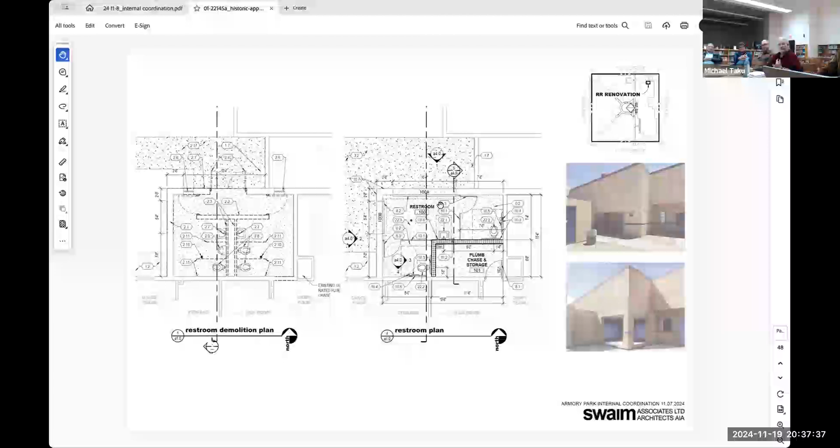Tangerine lace vine is still in your proposal, but there are none listed in your plans. Is that a potential for the coating on the planters, or did you have to remove it? We left it in as a potential, depending upon the cabling system and what vines and tendrils and self-climbing options there are. We'll still explore that.

So they got rid of the hackberries, and those are all pistachios now, correct? Correct. Is there a pro or con on the tangerine lace vine? I love them, and they last down to 19 degrees Fahrenheit, so they do really well. That's a thumbs up.

Last time you said the city is making you remove all of the oleanders around that one plan, but you showed 4 ash trees replacing it. The current plan does not have any of those ash trees. Is it just a barren plot of gravel now around that north side of the structure? I might have misspoken on that one. The city's not requiring us to remove the oleander. It was just a proposal.

Ah, so they're just going to stay. They're gonna stay. Okay, so for the record, the oleanders are staying. Any thoughts on the Armory Park requested tree?

We approached Elliot about it. The city is open to said tree. So Elliot, what's your thought? We were hoping for a big specimen down on the south side to help balance all the trees on the north side of the park while you're putting in new plumbing. Is that a possibility? And Armory Park could pay for a plaque?

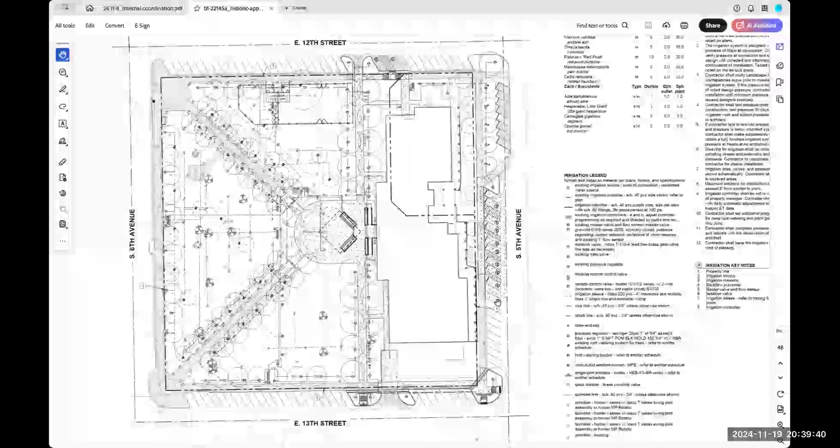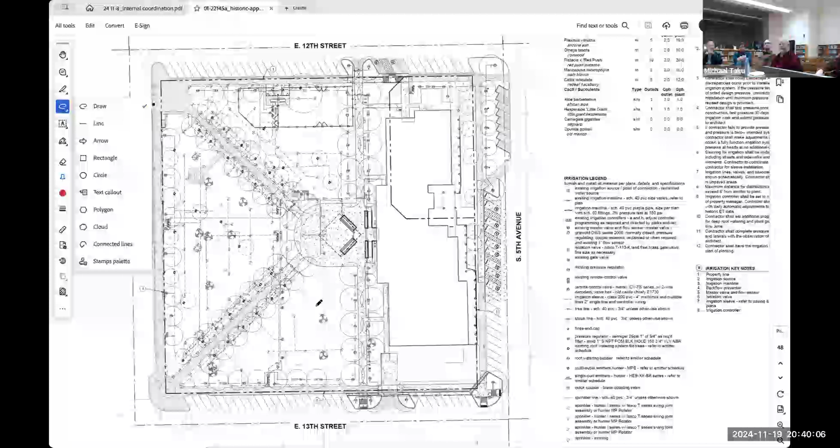My biggest concern with anything we're talking about planting is staying away from our very large and very shallow water line. That is my number one concern. We were talking about the big expansive area around the camera in the lower quadrant, because there are a number of trees in the northern quadrant, including the Aleppo pines and others, and they're not very good. But somewhere down there that wouldn't interfere with your water line, can you add a tree that we could put a plaque on saying the Armory Park Neighborhood Memorial Tree? I don't see why not.

Okay, run that area a little bit farther west. Go west, and south. Just somewhere in there, one of the locations. We'll find a good location for you. Is there a pistachio that size you're looking for in the species? The pistachios work really well. The one on the north or south side of the Children's Museum is really nice and blooms every year, does a full color bed, and it's a specimen tree and they're hardy.

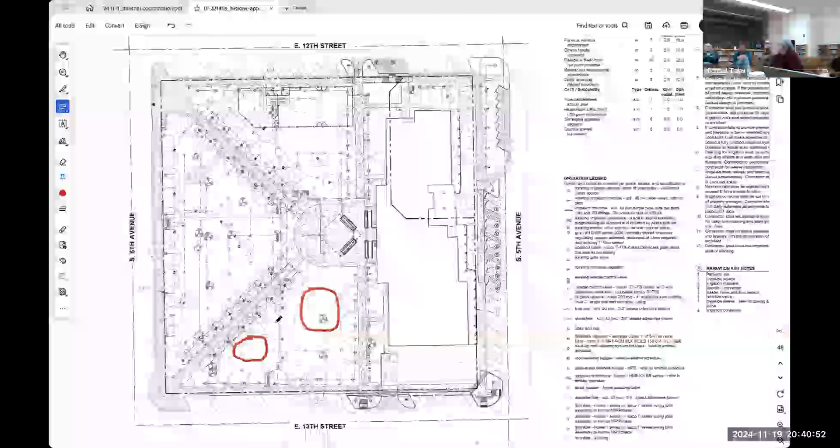See what the proposal is. I'm okay with that. We could roll that into the future discussion with the neighborhood.

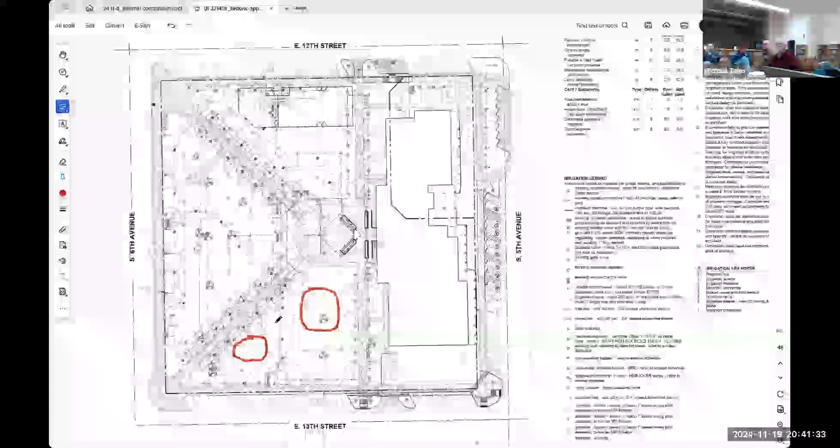And if nobody caught it, they're now doing succession plantings along the alleys, but they are oak now instead of ash, so there'll be a slightly darker green. And they are replacing the blown over cypress, just so we're on the same page.

So on the discussion of the species, Matt and I talked about it multiple times, and the idea was that we want to maintain an evergreen tree as opposed to a deciduous tree, as we know the Italian cypress are going to die out. We already lost one or two during the storm this last year. So as the live oaks grow and mature, since they're slow growing trees, that will nicely transition away from the cypress. But you are putting in a replacement for the blown over one in this iteration.

Okay, great. John, anything else? Okay, I just want to say, I think we're good, guys.

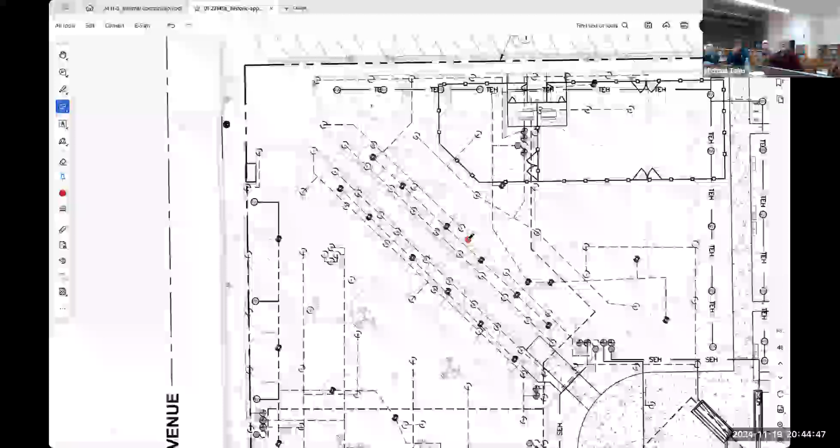You can put it in your motion, yes, Mr. Chair. Okay then, I request we make the motion that we revise it with the statement about the dog park. Great, I'll put it in the final motion so that we're very clear moving forward. Is everybody else okay with it?

Sure, great, all right, thanks so much. I know this has been a long meeting. I'm really glad you all are continuing to work on this and find that it's going so much better than before.